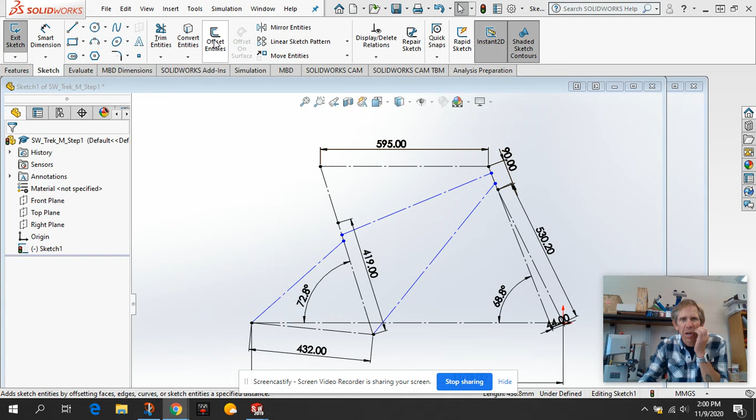So now that you've got your frame all done in construction lines, our next step is to actually give those lines and turn them into tubes. So we're going to do that by using a new tool called the offset tool. The offset tool is a really cool tool that will take one line and create a copy of it offset a certain amount. So I'm going to click on offset tool, and let's first offset our seat tube.

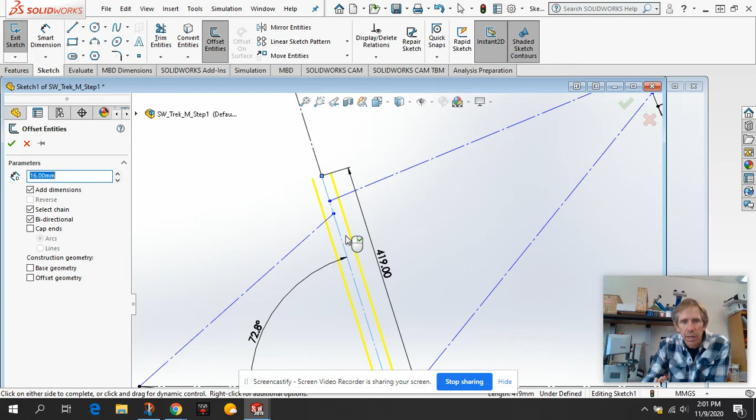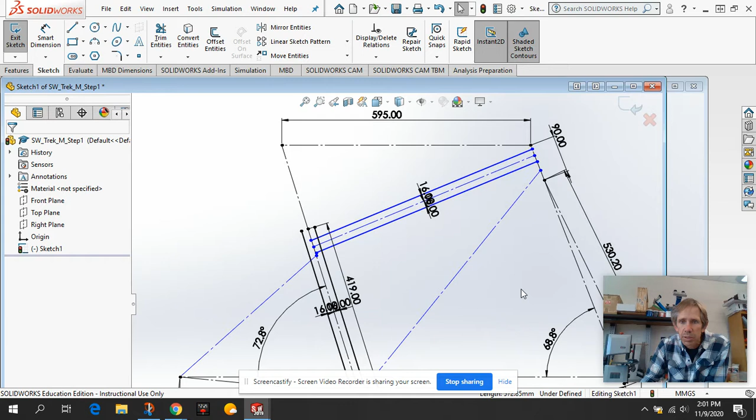Now I want to do the same thing on the top tube, and the top tube has the same dimensions. So I'm going to click offset, click on my top tube, and again I've got a preview of 16 millimeter offset. Looks good. Click OK. I'm going to go through and do that to all the tubes. So my down tube is a little bit larger in diameter. So my down tube is actually 44 millimeters. So we'll change that to 22 millimeters on each side. Click. 22 millimeters on each side.

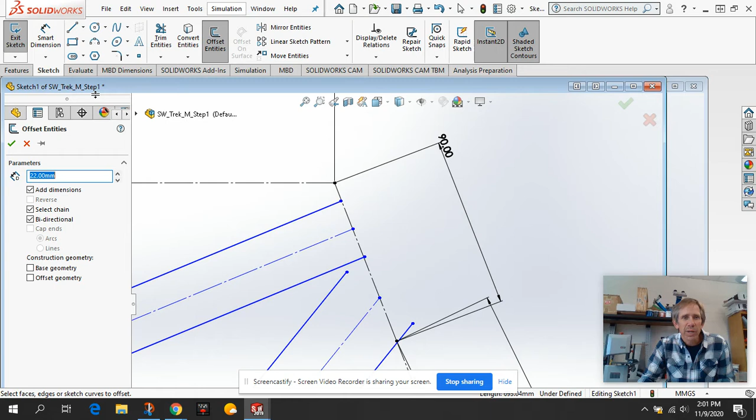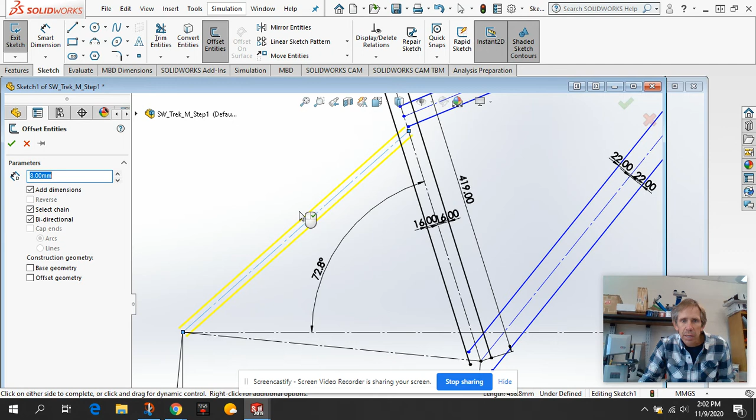And then my head tube, we're going to offset that as well. Offset on the head tube is 38 millimeters. And so we'll offset that 19 and click there. And then after we've done those, we've got to get to our bottom bracket and chain stays. All right, so we're going to offset the seat stays, which are 16. So I'm going to do 8 on each side, and then click. That looks good. And my chain stays are 22, so I'm going to offset that 11 millimeters on each side.

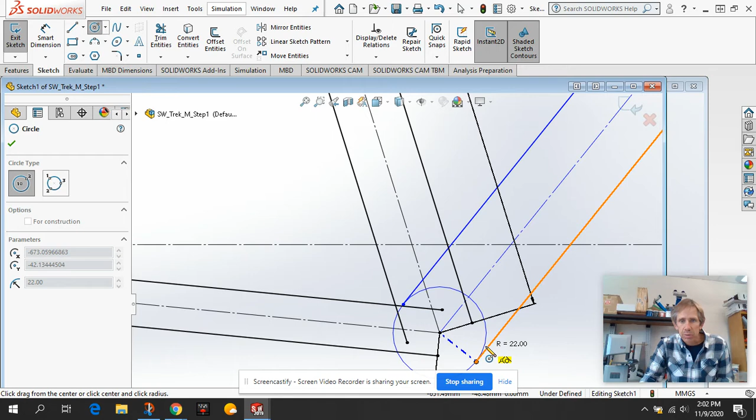Click OK. And then now we need to go in and draw a circle for our bottom bracket. And the diameter of a bottom bracket shell is 40. So it's a radius of 20. So for this one, I'm just going to draw it, use my dimension tool, and dimension that as 40.

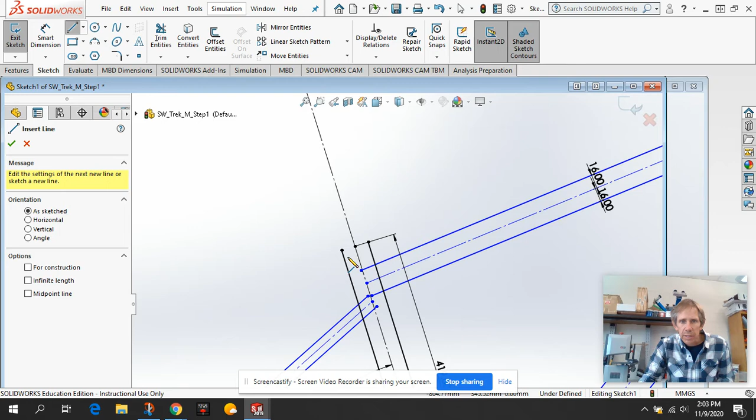Okay, looks good. And so the other couple things we need to do is we need to top off this seat tube here. I'm just going to draw a line across like that. And then I'm going to come up to my head tube and do that same thing. I'm going to draw a line across the top of my head tube, and then I'm going to draw a line on the bottom of my head tube.

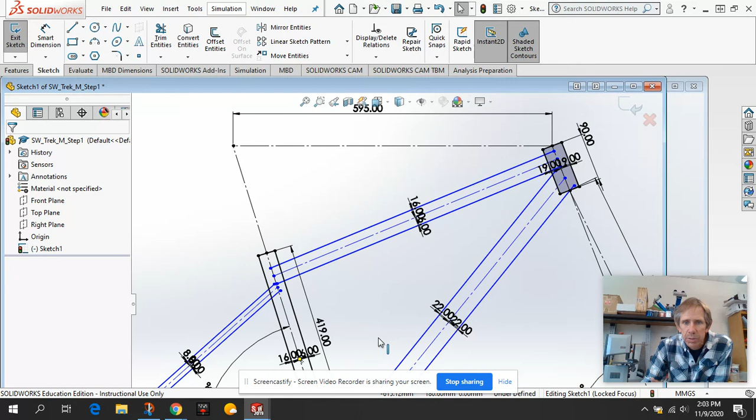All right, so that's the video on how to use the offset tool to offset all the tubes in your bike frame drawing.